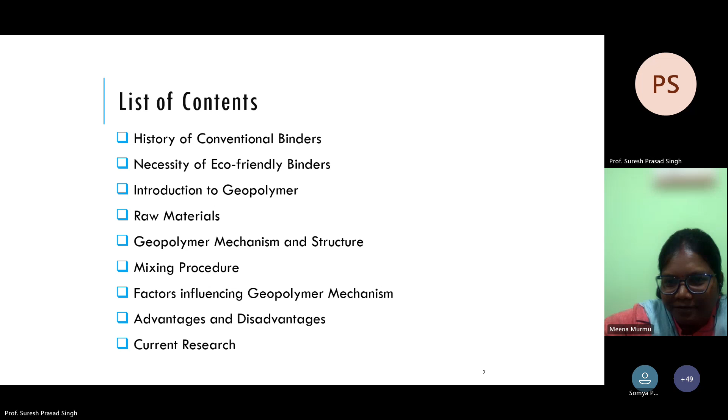This outline of the presentation will touch upon the history of conventional binders, necessity of eco-friendly binders, introduction to geopolymer, raw materials required for the synthesis of geopolymers, geopolymer mechanism and structure, factors influencing geopolymer mechanism, advantages and disadvantages of geopolymer, and research in this area.

Coming to the history of conventional binders: the conventional binder that civil engineers use in construction is OPC, ordinary Portland cement, and it is extremely used in our construction industries. It is the second most abundantly used material next to water, and the annual production of OPC is about 4.4 billion tons in 2023.

If you see the increase of OPC production from 1995 to 2023, it is around 1.3 billion tons increasing to around 4.4 billion tons, and the demand for cement is increasing day by day because of infrastructural development and associated activities.

But the problem with OPC, despite huge demand, is that it causes several environmental impacts. Serious environmental issues are related to the production of OPC.

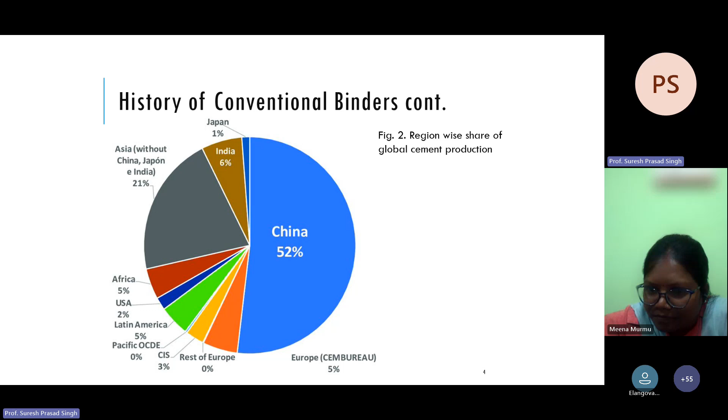Coming to the global production of OPC, this conventional binder: China is 52%, India 6%, Japan 1%. Altogether, these Asian countries account for around 80% of cement production, and all other continents contribute only 20%. India has a major share of around 6% in cement consumption, next to China.

And if you see the production process of OPC, is it sustainable or not? So can you tell me, what is the material we are using as civil engineers in our construction - is it a sustainable material?

Focusing on this one, I'll tell you that production of cement requires huge mining of natural resources. We use limestone, dolomite, and natural clay as ingredients for manufacture of cement, which is not a renewable source, because once the limestone or dolomite is exhausted, it will be exhausted. It is not a renewable source of material. So huge amount of natural resources are mined for this.

This mining is accompanied by high energy consumption. The energy consumption for 1 ton production of OPC is around 3.5 to 4 gigajoules of energy. Huge energy we require, and to get that energy we burn fossil fuel, coal, or petroleum products, resulting in high emission of greenhouse gases.

It is said that about 0.85 tons of carbon dioxide is released for production of 1 ton of cement. The present cement production is 4.4 billion tons annually, meaning around 4 billion tons of carbon dioxide we are releasing to atmosphere, which causes great concern to our environment. The cement industry alone is responsible for 5 to 8% of carbon dioxide emission globally.

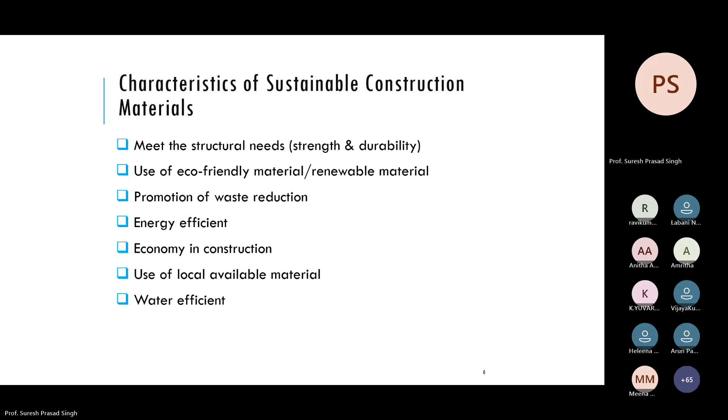If you construct a pyramid, it will be appreciated - it is a very big, huge structure. If you construct a Burj Tower, it will be appreciated. And particularly roads, rail networks, embankments, dams - huge material we use, we consume the material. So civil engineers consume natural resources abundantly.

So we are civil engineers, so we have to see how the use of natural resources can be minimized. But keeping this in mind, our construction activities should not suffer. So there is a societal need and there is a restriction, and that has to be balanced between societal need and our construction material.

Then next comes the environmental concern. So once you are using a material in civil engineering construction, it should be environment friendly. It should not affect the environment much, so the environmental impact should be minimum. First, we have to meet the need of the society. Second, it should not pollute the environment or have a bad effect on it.

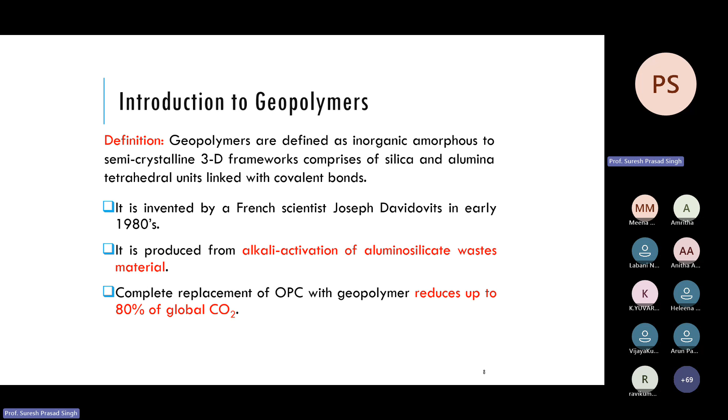Then coming to what is the raw material - where do you get this raw material from for geopolymer production? Mostly it is waste material, industrial byproducts. Industrial waste like slag, blast furnace slag, fly ash, rice ash, red mud, municipal solid incineration ash - these are industrial byproducts. Nowadays we don't call it waste, all are byproducts that we can use in our construction or other purposes.

Then we have construction and demolition waste - construction cement, concrete, brick, crushed brick - these can also be used for production of geopolymer.

Then agricultural waste: we have rice husk ash, sawdust ash, bagasse ash. All this material can be used as mineral resources for the manufacture of geopolymer. And you see, I'm telling that blast furnace slag and fly ash can also be used.

So what is fly ash? This fly ash we used to get from the power plants, from burning of coal. We got the fly ash. So what is fly ash?

If the coal, which is carbon, and pulverized coal is burned in the boilers of the thermal power plant, the residue is fly ash. If the carbon is burnt in the boiler, it gets oxidized and becomes carbon dioxide, which is released to the atmosphere. Then what is left? The left out portion we call fly ash.

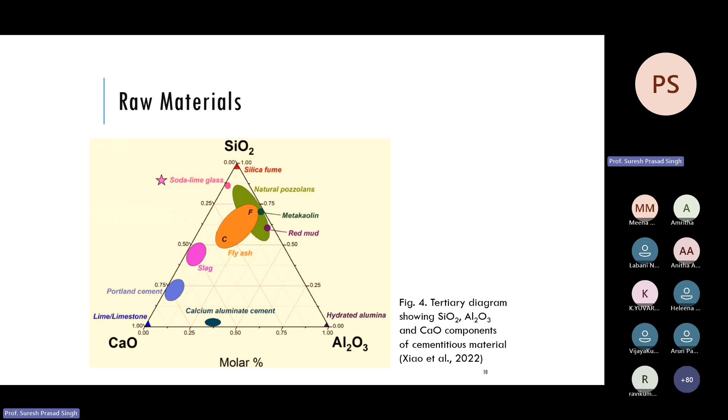Now coming to the raw materials used for manufacturing geopolymer, it is arranged like this: we have Portland cement with its composition of calcium oxide, aluminum and silicon oxides. Then we have slag, blast furnace slag, and fly ash—you can see class C and class F fly ash based on their calcium oxide or other composition. Then we have red mud, metakaolin, silica fume, limestone, and all these materials used in the synthesis of geopolymer, or as binding material.

Coming to raw material production, for blast furnace slag and steel slag, the top producer is China. India is the second largest producer of crude steel as well as blast furnace slag and steel slag. A huge amount of this slag or waste byproduct, which can be effectively used in geopolymer production, is generated in India, since we are also the second largest producer of fly ash—both main components in geopolymer production.

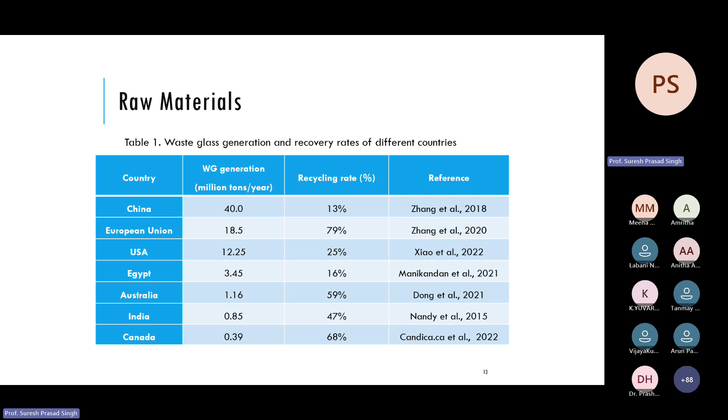So the process of geopolymerization is like this: we have the raw material, and it should be aluminosilicate material in glassy phase, not crystalline phase. Then we have an activator—either alkali activator or acid activator, giving acid activated or alkali activated geopolymer accordingly. But most of the research is on alkali activated geopolymer.

So we have a raw material and an activator, which is mostly sodium hydroxide, potassium hydroxide, silicates of sodium and potassium. When we add this, there will be dissolution of the raw material, which contains silica, alumina, oxygen, and other elements. These elements get dissolved, giving silica, alumina, oxygen, hydrogen, and of course we are adding sodium or potassium from the alkali activator. By adding these two, the elements get separated because it is an amorphous structure.

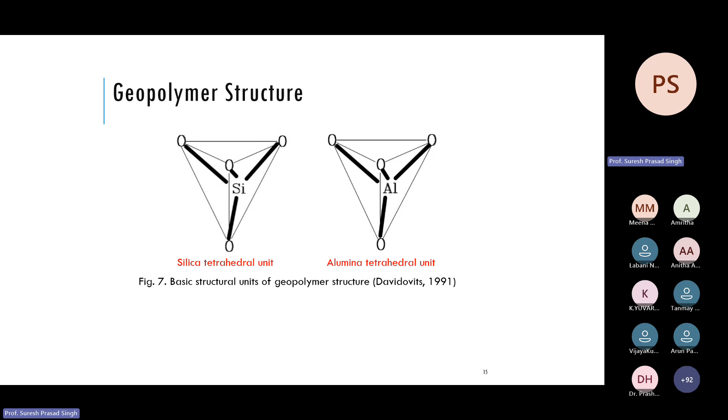So this is the basic structure of geopolymer formation started. First is dissolution, then formation of this type of structure. This structure is given by Davidovits. Next, this is linked to form a chain-like structure or continuous structure.

We have this, depending upon the silica to alumina ratio in our aqueous solution. If it is close to 1, we call it polysialate. If it is 2, we call it polysialate siloxo. If the silicon to alumina ratio is 3, we call it polysialate disiloxo. Here, a sialate ring like this one.

So next you see how it is linked. If the silica and alumina ratio is 1, you see the structure: there is 1 silicon, 1 aluminum, then an OH group is there. And if you see that middle oxygen here, it has a negative charge deficiency, which is shared by a potassium ion.

This aluminum, you see, this is silicon which has +4 charges, positive charges, shared by covalent bonds. Each positive charge is shared by a negative charge here, so it is balanced for silicon. But if you see this aluminum here, it has 3 positive charges shared by 4 units, 1 covalent bond. So this aluminum has a shortage, its valence is +3, but it is shared by 4 negative ions. So it has a shortage of a positive ion, a net negative balance, which is balanced by a potassium cation.

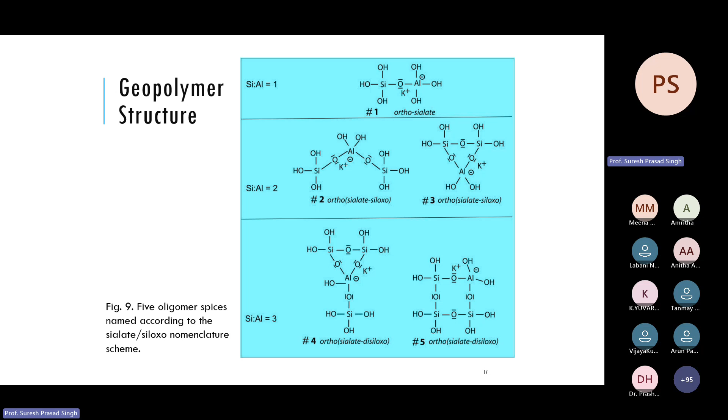Some amount of water is released, but we need to add water so that there will be an aqueous solution, so the transfer or movement of elements from one place to another, so that a bonding will be formed. Water acts as a medium for transport of the ions, metal and OH oxygen ions. Finally, it releases water in the process and we'll get a 3D structure.

This is the basics about how the structure is formed, but we civil engineers were not that much bothered or interested in this. We, as civil engineers, were more interested to know the strength, the durability, performance, fresh properties, hardened properties, and things like that.

As I told, if the silica to alumina ratio is 1:1, we'll get tiles, ceramics, and those geopolymers can be used for fire resistance. If it is 2:1, cement concrete. So for the manufacture of geopolymer cement, this ratio of silicon to aluminum should be 2, and slightly above this 2, and we'll get cement concrete.

If it is more, then the properties of cement required, compared to OPC, will not be there. So you will be using 2 to 3, and that will be most optimum, I'll tell you. Still higher you can go, but it depends upon the silicon aluminum ratio that should be there.

Then we'll have this—how we will produce this one? The process of production of geopolymer concrete: you have a coarse aggregate, as usual in the production of OPC or concrete from OPC. We have a coarse aggregate, then a fine aggregate like sand, then cement in conventional concrete. But here we have an aluminosilicate material, and this aluminosilicate material should be in amorphous stage.

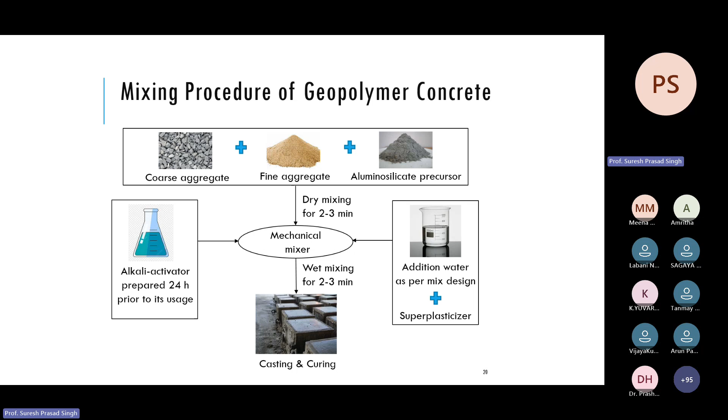Coming to the factors influencing geopolymer mechanism, we'll see how a good geopolymer can be produced. First is the type of aluminosilicate precursor, fineness of the precursor measured in terms of specific surface area, type and concentration of alkali activator, molar ratios such as silica to aluminum, sodium to aluminum, and calcium to silicon ratio. There should be a proper range of ratios which gives the best geopolymer. Next is the liquid alkali activator to solid binder ratio, water content, time of mixing, and curing regime. All these factors influence the strength and durability of the geopolymer.

It is not only about the availability of silicon and alumina in the source material, but how much of it gets dissolved. The bonding of silicon and aluminum in the material is in oxide form, and when you add alkali, they get released. But the bonding strength between silicon-oxygen and aluminum-oxygen differs, so different magnitudes of silicon and aluminum will be released from the aluminosilicate material. Even though it contains aluminosilicate material, not all of it will be released at the same concentration or molarity of alkali.

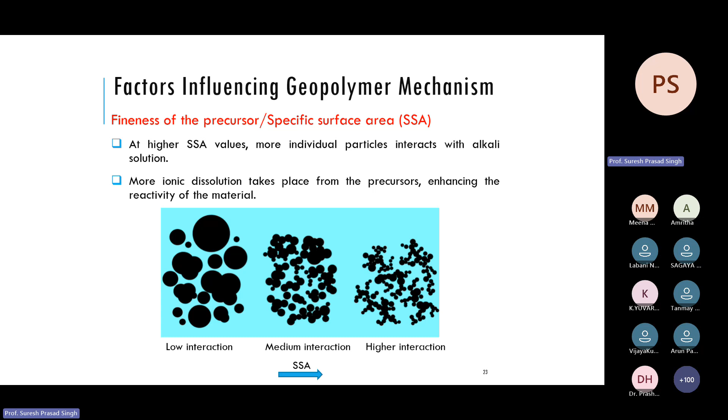Then the type and concentration of alkali. Normally you use sodium hydroxide, potassium hydroxide, sodium silicate, potassium silicate, and combinations of these. You use silicate in conjunction with the alkali material because sometimes the silica to alumina ratio, which should be 2 to 3, is not obtained from the source material. Whatever source material like fly ash or slag you are using, if this ratio is not maintained and silica is less, we use sodium silicate to supplement it.

The release of silica from sodium silicate is easier because the bonding between silicon and oxygen there is very weak. So if you use sodium silicate in conjunction with sodium hydroxide, you get a lot of silica ions, giving an optimal silicon to aluminum ratio of 2:1, which gives better strength.

So appropriate alkali concentration matters, and there is a lot of research on cation diameter and such things. But in a nutshell, it depends on the concentration and type of alkali, and the secondary source of silicon. If you add sodium silicate or potassium silicate in conjunction with sodium hydroxide, that becomes the secondary source of silicon to the structure.

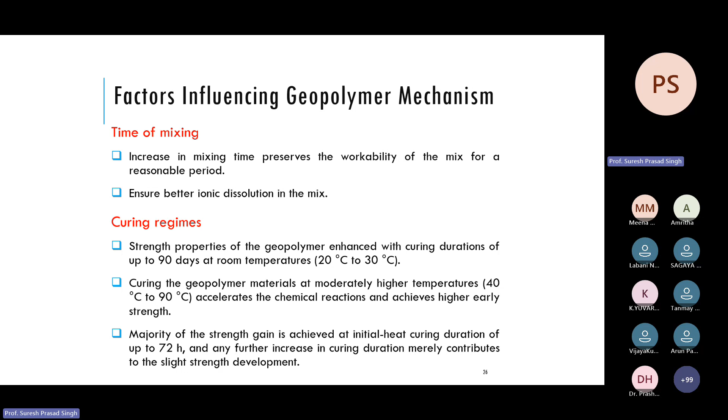Then the curing regime. Geopolymer can be formed at any temperature, ambient temperature and all these things, but it is found that initial heat curing is very beneficial for strength and durability. Most research papers say initial 24 hours, or up to 3 days, of heat curing, after which ambient curing, maybe 20 to 30 degree curing, will give good strength. But initially, any temperature above the freezing point of water can develop the strength, though heat curing is found to be very much beneficial.

Advantages of this geopolymer: it gives 80% reduction in carbon emission, higher strength and structural properties, low creep and shrinkage, higher resistance to fire and chemical attacks, low permeability, and better encapsulation of metallic ions. Since most raw materials we use are industrial waste or byproducts, they contain metallic ions, heavy metals, and toxic elements. The geopolymer structure encapsulates these harmful metallic ions; otherwise they would leach into the surrounding and create environmental impact. So there is good encapsulation of ions, which reduces the waste management issue.

Several industries are highly suitable for precast applications because it's a very fast setting material.

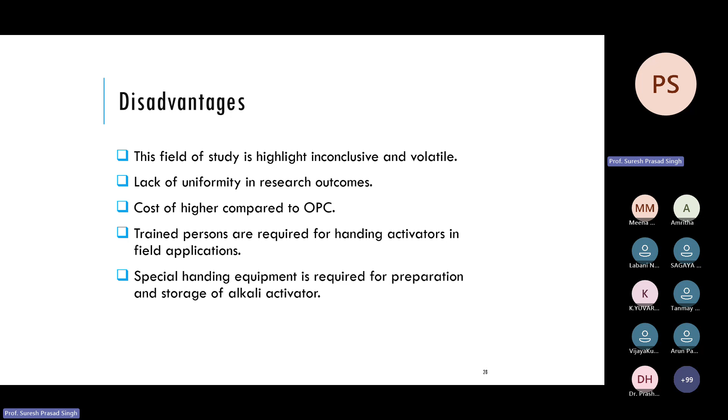As for disadvantages, this field of study is highly inconclusive. Research available on geopolymer depends upon method of manufacture, raw material used, and all the parameters discussed earlier, so different strengths result. There is no generalization about strength, durability, production process and all these things; it has not yet evolved. So there is a lack of uniformity in research outcomes, with some contradictory results, and the cost is also higher.

That's not audible. Hello. Hello.

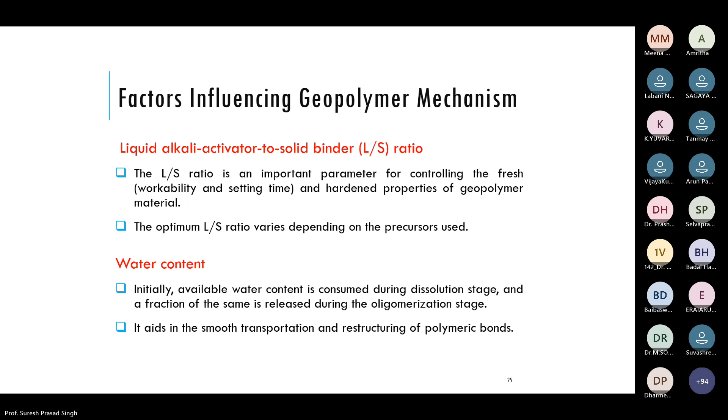There are some disadvantages, and one of the biggest is handling alkali in the field. As I told, there is a solution to that: a one-part geopolymer. People are researching on this.

Coming to this, I will just highlight some of the things we recently did in our institute here. So many research works are there: geopolymer produced from slag, from fly ash, other aluminosilicate raw materials, or binary geopolymers.

Recently we tried granulated blast furnace slag with soda lime glass. There is a huge amount of waste glass dumped or thrown, and the motive of using soda lime glass in geopolymer is that geopolymer requires alkali material - we use sodium hydroxide, potassium hydroxide, or silicates as a source of alkaline material. This soda lime glass contains a high percentage of sodium oxide, and if you use a part of the soda waste glass along with the slag, the consumption of alkali material will be reduced much.

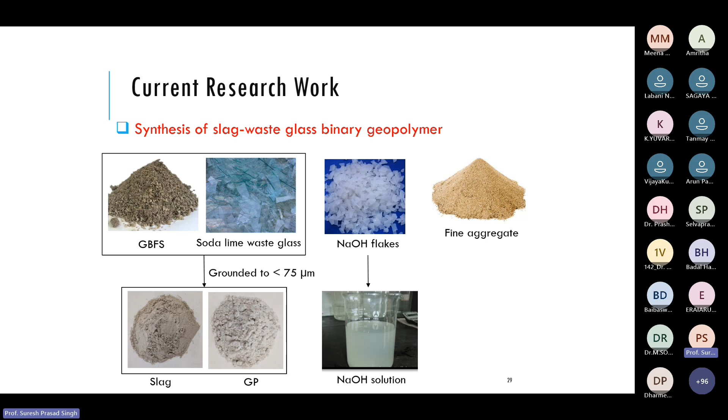Both are amorphous. There are no remarkable peaks, only two humps there, and these humps show that the material is in glass stage or amorphous stage. There is no crystalline structure. And as I told, the material, aluminum silicate material, should be in glassy phase so that will give you better

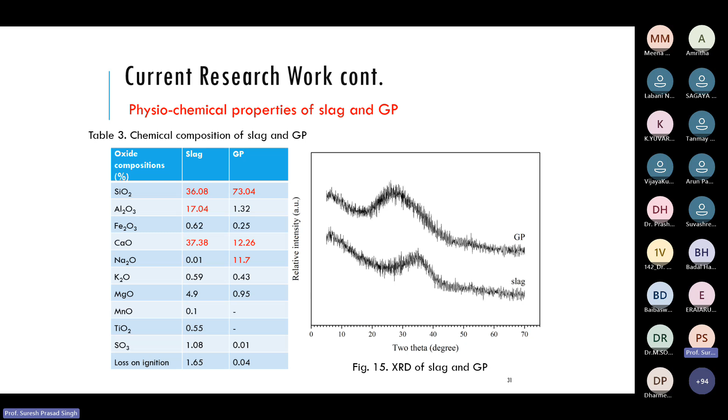geopolymer. So both materials, what is found from the XRD, are highly glassy or amorphous. This is the composition of slag and GP, and you see that sodium oxide, 11%, is there in GP. This reduces the consumption of sodium hydroxide, used as alkaline activator, because this contains sodium oxide, sodium cations. And the release of silica is also more here, contributing silicon ions for geopolymer production. So these are the two advantages of using GP along with fly ash or slag and all these things.

So we have tried with different GP content, then the sodium hydroxide concentration starting from 2 molar to 10 molar, liquid alkali activator to solid binder ratio starting from 0.25 to 0.45. And we have prepared these mortar samples with standard sand and binder ratio of 3:1.

Time will not permit going through all these things, so I will just tell you the salient features. The solubility of slag is the basic thing you have to see, the release of silicon and aluminum ions. First you have to check the solubility, then study the fresh properties like setting period, soundness, then the hardened properties, compressive strength, mineralogical study, and then durability.

So in the durability studies, we studied resistance to fire attack. As I told you, if you use soda lime glass, the residual strength after exposure to fire will be high because it retains strength even when exposed to high temperature. That is one of the major things we got here.

Then resistance to freeze-thaw, wetting-drying cycles, similar to what we do for conventional cement. This includes wetting-drying and freeze-thaw cycles, water slaking, then resistance to acid attack, chemical acid, alkali-silica reaction. These are the durability studies we have made on this slag-GP binary geopolymer.

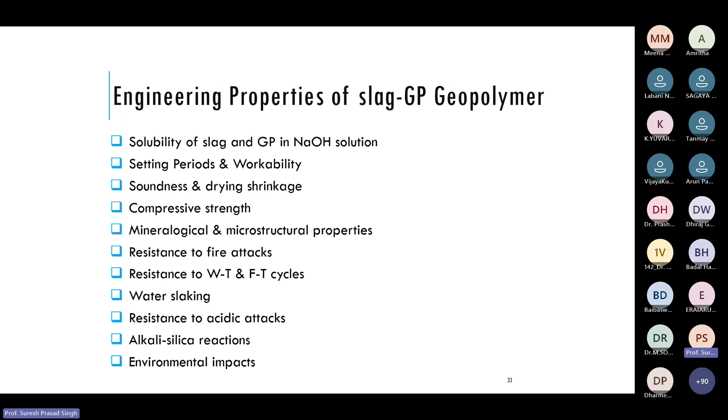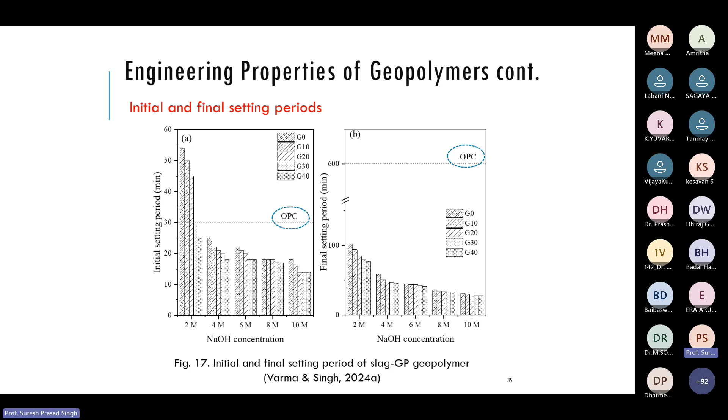One key feature is the quick setting of this geopolymer paste. Normally OPC should have an initial setting time of 30 minutes and final setting time of 10 hours. But in geopolymer, the setting time is too less. So sometimes we use borax to increase the setting time, because it is a very quick setting material. We modify it by adding compounds to increase the setting period. But it is observed that it is still too less here - instead of final setting around 10 hours, we got less than this.

Then we have the soundness test. Soundness was determined with different molarities and glass content. As per IS 4031, the soundness should be less than 10 mm, but we got a maximum of 4 mm soundness.

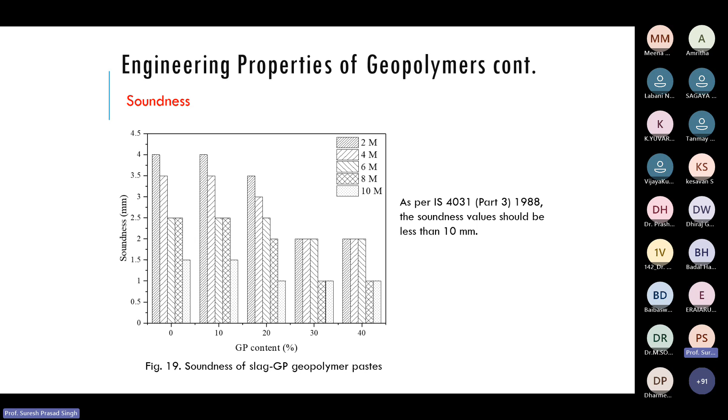What are the benefits you are getting out of this? And then the compressive strength, with different molarities and different glass content. But as you can see, if you replace the slag by glass powder, the strength reduces continuously. This happens with normal curing, meaning an ambient condition between 20 to 30 degrees.

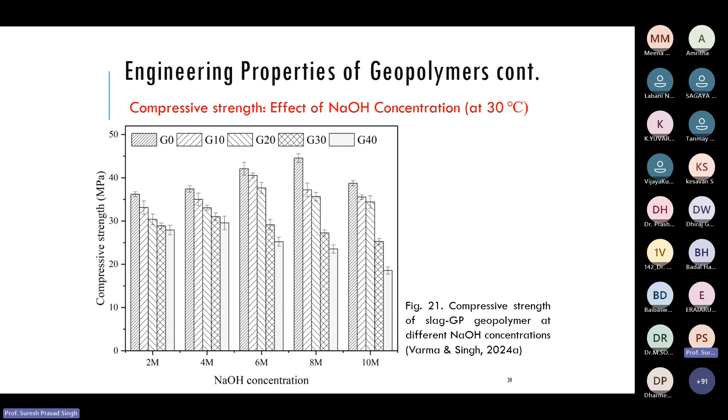This is because the release of bonding will be strong, release of silicon will be less, and slag will have a lot of calcium component. So in the geopolymeric product, if you use slag, we will have hydration products because of calcium—we get calcium silicate hydrate, calcium aluminate hydrate, in addition to the geopolymeric product. But if you replace the slag with glass powder, we will be sacrificing these hydration products like calcium silicate hydrate and calcium aluminate hydrate that we got from the cement.

But with high temperature, the strength increases. This gives you the normal temperature at ambient 30 degrees. Everywhere we still get less strength if we increase the glass content.

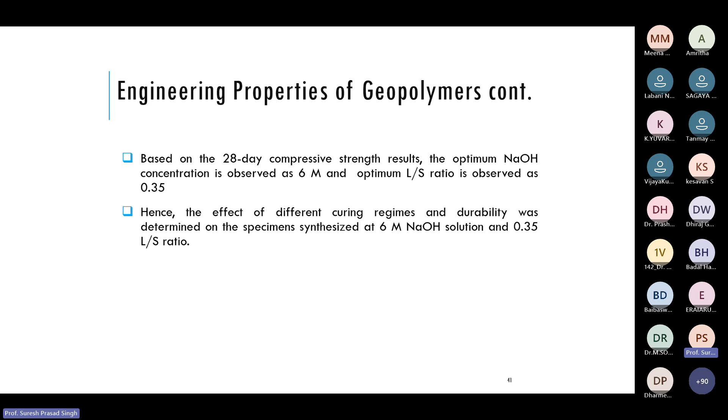I have only 20 minutes, okay.

As the temperature increases, the strength gain with time also increases, and the final strength will also be high. So what this tells us is that although it's said that above freezing point it will harden, the most optimum value is obtained at an initial high temperature of 45 to 60 degrees.

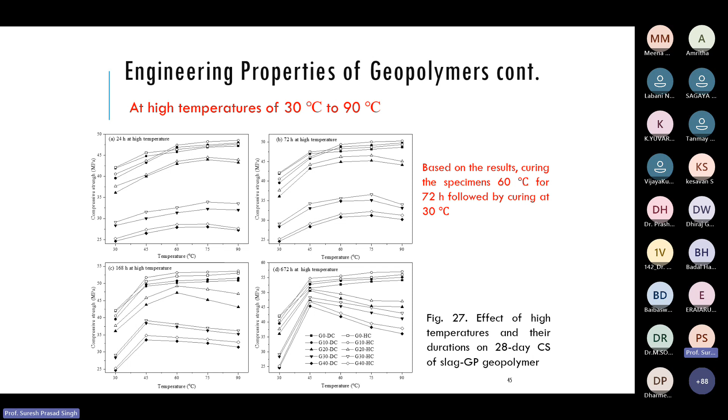Based on the study, the specimen should be cured at 60 degrees for 3 days, followed by normal curing. So initial high temperature curing favors high strength gain and high ultimate strength.

One more thing we investigated: normally in concrete, curing is done under water. If you put the specimens in water, after 1 day we demold these sample cubes, then try to put them in water at different temperatures—30 and 60 degrees. We used different types of water: normal tap water, alkaline water, saline water, and so on.

What I find is, if you put our samples in normal tap water, since we have sodium hydroxide in the sample, there is an escape of sodium hydroxide from the sample into the water. That means after 1 day, the sodium hydroxide activator we added is not fully used for the production of geopolymer—some of it leaches out, so the strength reduces. So if you put a geopolymer sample in normal water for curing, there will be a reduction in strength. Instead, if you use alkaline water, this strength reduction will not occur. And as the temperature increases, the strength also increases.

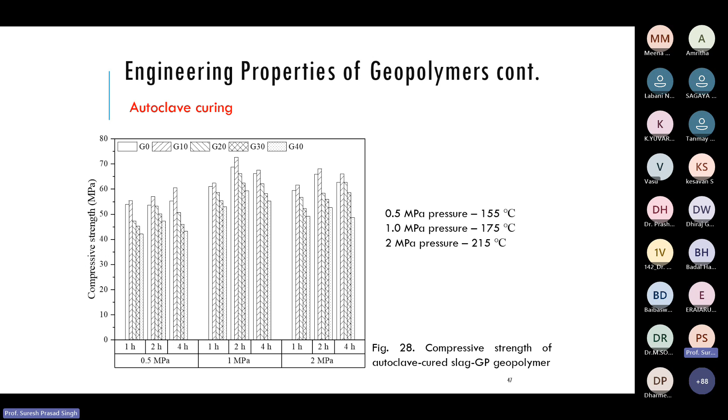We also conducted curing with autoclave, for uniform curing, so shrinkage cracks will not be there, uneven curing is not there. You can see that solid materials are formed once the autoclave curing is adapted.

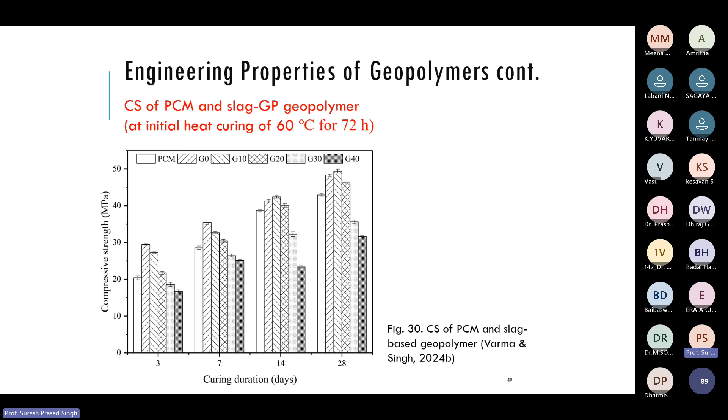This is the initial heat curing of 60 degrees for 72 hours. After that there is normal curing, and we got a very high strength, as high as 50 MPa.

We studied the durability against fire attack, wetting and drying, freezing and thawing cycles, water slaking, acidic attack, alkali silica reaction, and all these things.

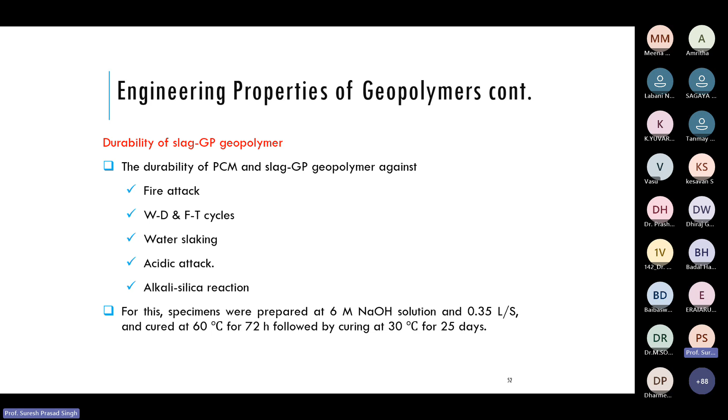All these tests were done on sample specimens prepared at 6 molar sodium hydroxide concentration, at a liquid to solid ratio of 0.35, cured for 28 days total. Initial curing was at 60 degrees centigrade for 72 hours, and after that at 30 degrees for the remaining 25 days.

The procedure we adopted: samples cured for 28 days, starting from ambient temperature around 30 degrees Celsius, gradually raised at 5 degrees centigrade per minute till it reaches 200, 400, 600 and so on. Once reached, samples are exposed to that high temperature for 1 hour, then we gradually reduce the temperature back to room temperature. Then we find out the mass loss and the residual strength.

For conventional Portland cement mortar, the mass loss is about 9%, but here it is only 1 to 2%. The corresponding residual strength, for 1000 degrees, shows much strength reduction in Portland cement, from 45 MPa down to around 5 MPa after exposure to 1000 degree centigrade heat.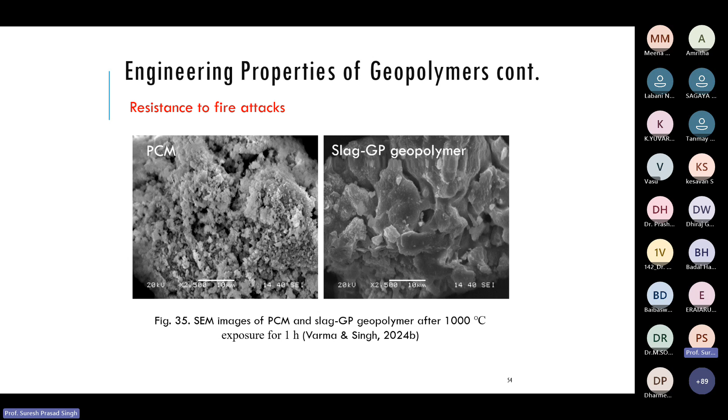So the structure is retained. This tells us that geopolymer is very good at resisting high temperature exposures.

Then again, similar thing with wetting, drying, and freezing curing cycles. It was exposed to a total of 12 cycles of wetting, drying, and freezing thawing. After 3, 6, 9, and 12 cycles of exposure, we determined the mass loss and measured the residual strength.

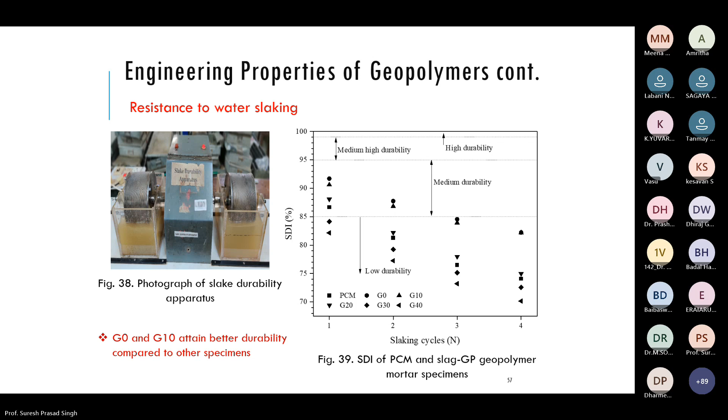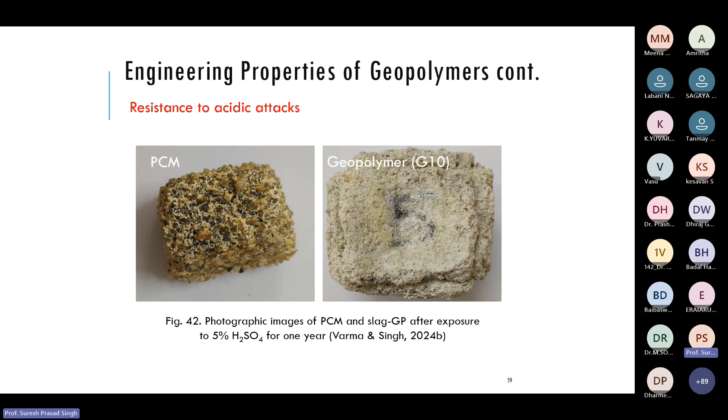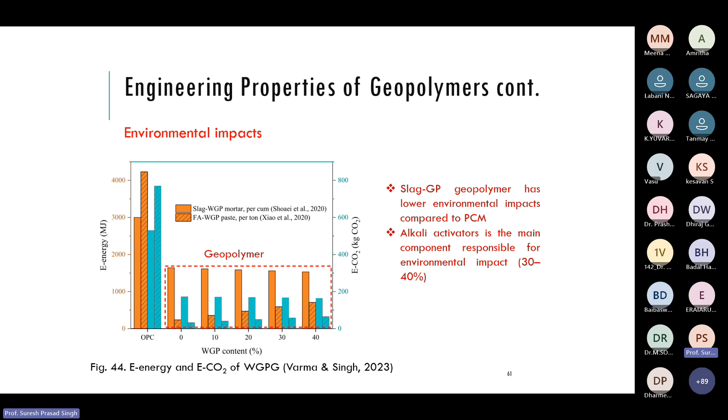We have also looked at energy consumption and carbon dioxide release. You see that energy consumption is much higher in the production of OPC, slag cement, and similar materials. But here we have much lower energy consumption as well as reduced carbon dioxide release, and overall you use sustainable waste material.

As I told you, the durability and strength properties of geopolymer mortar and concrete are much higher than conventional materials. The only issue is how to manufacture this in the field, because we will be handling highly alkaline material. Another problem is that if there is unreacted or excess alkali added in the field, it can leach into surrounding ground and water bodies - these are the two major problems associated with this.

One research direction is a one-part geopolymer, which would solve the issue of handling and storing the alkaline solution in the field, but that is yet to come to practical field application. I think that quickly covers the few things we wanted to discuss.

So the last thing I told you about is the part I have seen recently - one of my PhD students worked on using glass powder for partial substitution of slag by glass powder.

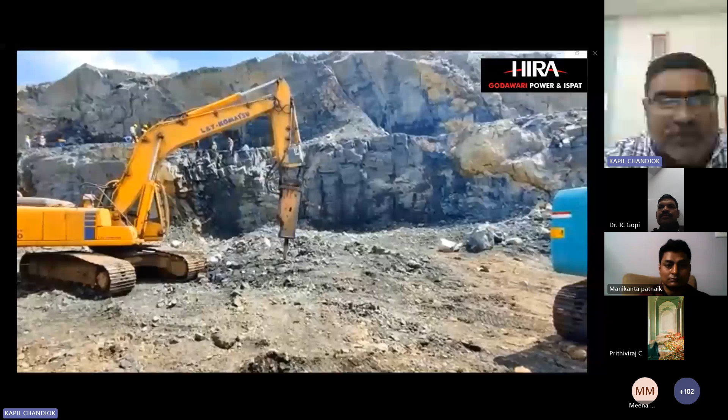This is the mine where we do mining activities, from these two mines - first one is from Aridongri and second one is from Boria. In forthcoming slides, I will be showing the process of how it is being handled - these are all circuits showing how the product is segregated, sized, screened, and the outcome includes slag and other byproducts from this process. This is our plant premises, a small temple is also there. These are areas which we are developing.

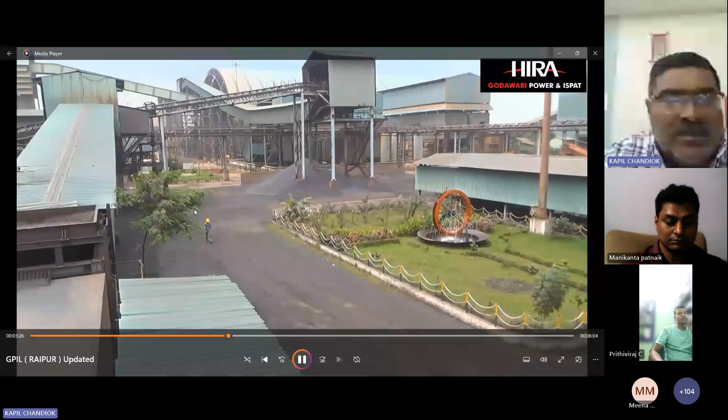This is the first division, the pellet plant. Pellet plant produces green steel. It's a pollution-free plant where you produce pellet directly from iron ore fines. Whatever fines are generated, we develop pellet here. This is the entire overall pictorial view of the pellet plant.

This is the balling mill in which the balls are prepared. Here the mixed material is poured and balls are prepared. This is a travel grate where the balls are generated to give them a proper shape.

This is the kiln where, at a temperature of 1400 degrees centigrade, the balls coming from the travel grate are roasted. This is the cooler where you get the material. This is the kind of material you are getting.

Now coming to the sponge iron plant. This is the sponge iron plant. Next is the power plant.

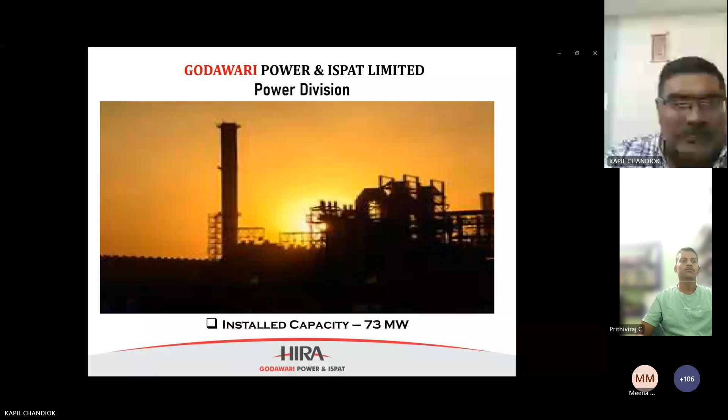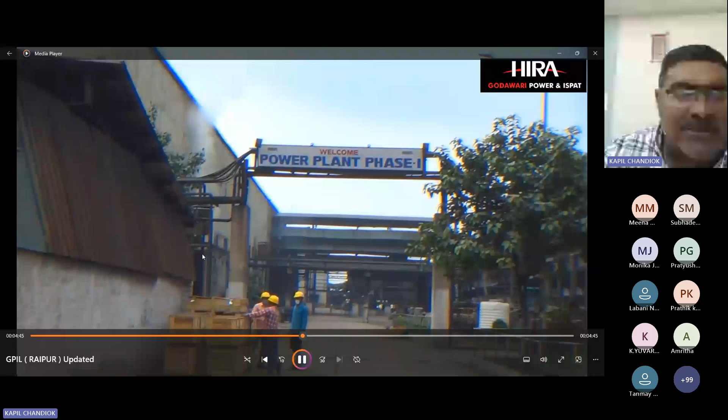This is the power plant which feeds power to everybody. Safety is our first concern. These are the cooling towers which keep the system running. This is the electrostatic precipitator, from which, after processing, we release the gases through the chimney.

So this is a very small view of our entire plant. This is phase 2. Let me hold it here. See, this is the ESP, this is the ABC DSC building, and this is the kiln portion.

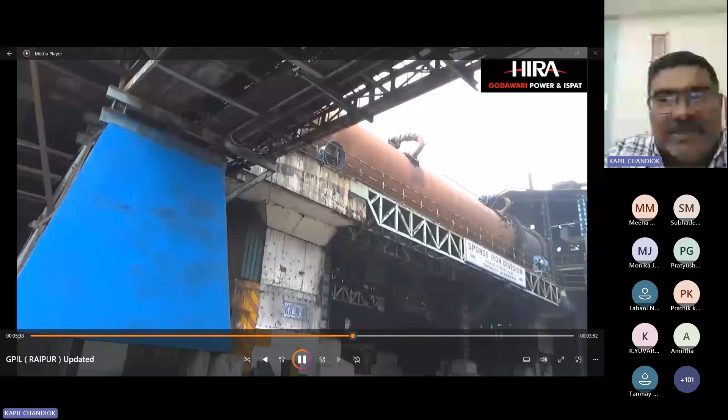These are all the coolers which come up after heating. This section is being treated, and this is the final discharge where you get the material out. These are all the supporting infrastructure. This is the pellet plant output.

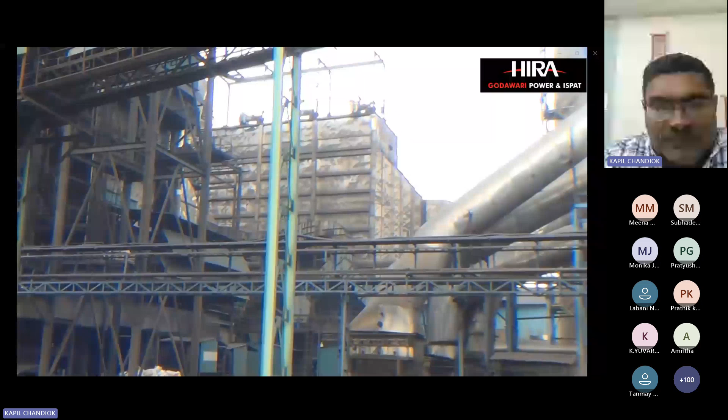This is our stock where material is stored. Now coming to the ferroalloys division, we produce 16,500 tons of silicomanganese, which requires manganese, iron, and coal.

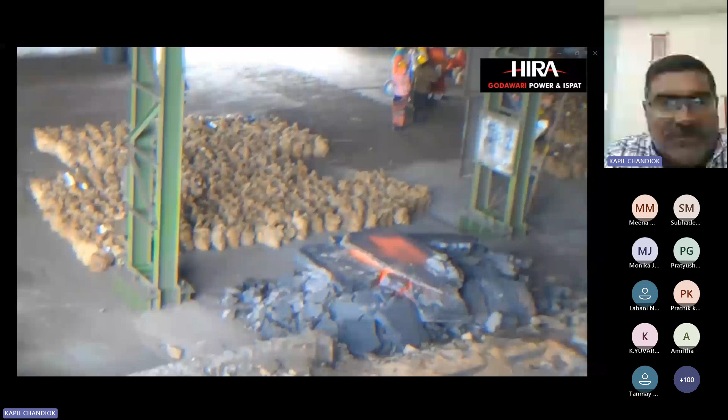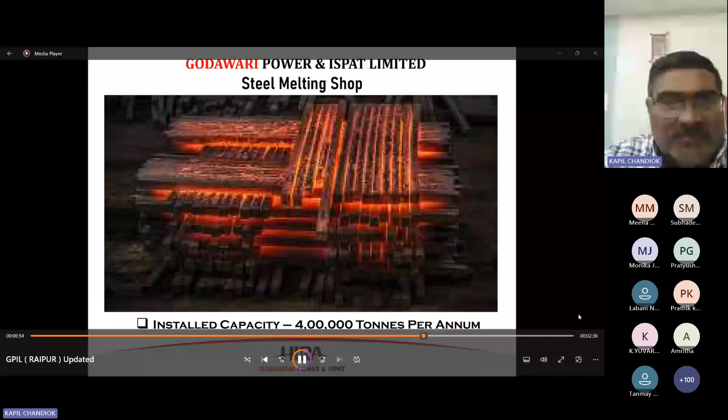We have a steel melting shop where we produce 4 lakh tons of billets. These are the furnaces; I'll explain this in more depth in the next slides, what kind of material and slag we get. Everybody talks about the slag, but what is that slag and how are we getting it?

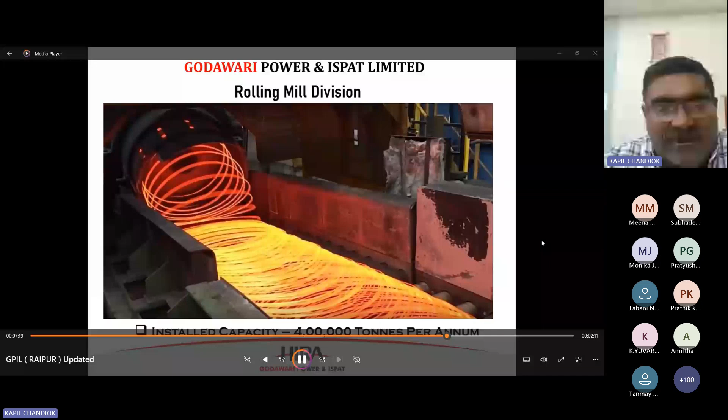This is the process. Next, we have a rolling mill of 4 lakh tons per annum capacity. This is how the rolling mill comes up with preparing HB wires.

Billets are turned into wires, and these wires are further processed into binding wire, nails, and other activities. This is how they are produced. This is the cooling bed, and now it's at the final edge of packing. This is how things are packed.

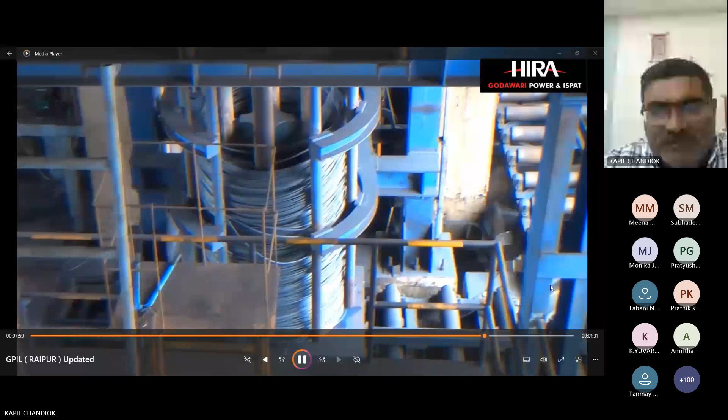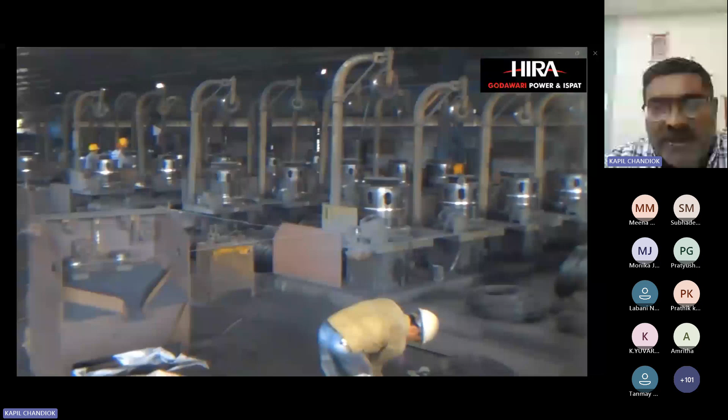This is the wire drawing section, where HB wire is brought and drawn into smaller sections. Here different gauges of wire are prepared for different purposes, from binding wire to annealing wires, everything. Whatever gauge you require is drawn here only. These are the small bundles which are available and ready to pack, ready to dispatch.

This is our railway siding. Finally, the material is dispatched to other states and other countries, and this is the point where we receive the raw materials.

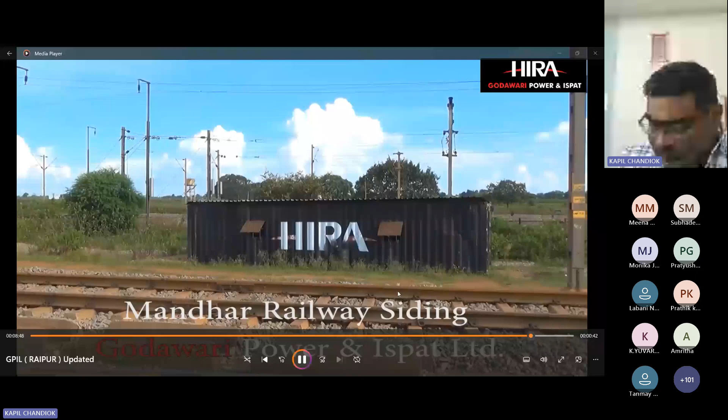This is the entire process and business scenario of what we are doing here. This is the final picture of Godavari. Now coming back to the topic.

Sir, it is not audible. Hello, sir, yes sir, you are not audible. I think due to some network problem, it is not clear. Now is it audible? Yes sir, it is audible. Your slide is also not visible, so you may have disconnected. Okay, what about that video I played, is it visible or not? Yeah, that one is okay. Within a few seconds, it was not visible. Okay, now coming back to the main slides. Yeah, now it is okay.

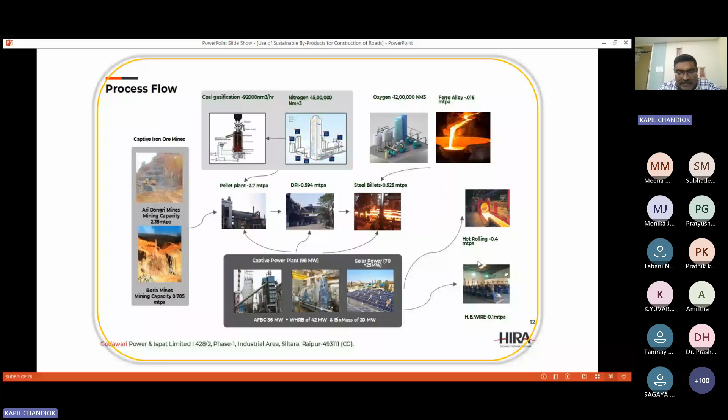Now, what are the byproducts and where are we getting them? First is steel slag, a byproduct of steel production used as a replacement for natural aggregates in road construction. Second is fly ash, a byproduct of coal combustion used in concrete and cement production for road construction.

Construction and demolition waste is recycled material from demolished buildings used in base and sub-base layers. Recycled asphalt pavement is reclaimed asphalt from old roads, reused in new asphalt. There's also plastic waste and blast furnace slag waste. These are the wastes which we are using in the construction industry.

Now coming to steel slag. What is steel slag? How is it produced and where is it used? Before coming to this, I would like to share some good slides so you can be very clear where it comes from and how it is used.

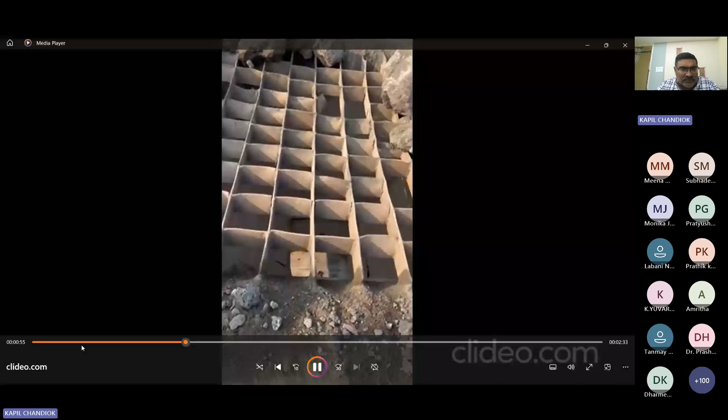Now it is visible. See, this is the furnace where metals are being melted, and this man is bringing the top dust particles and slag outside the pit with the help of this spoon. This is the material which comes out. This is the actual slag which is being transported to the slag crusher, which I'll show you in the next slide.

See how things are being drawn out. This is the furnace. They are pouring the fresh material from this end, and slag has been dragged out from the pits to this portion. There is a bucket there, and this metal is taken to a yard.

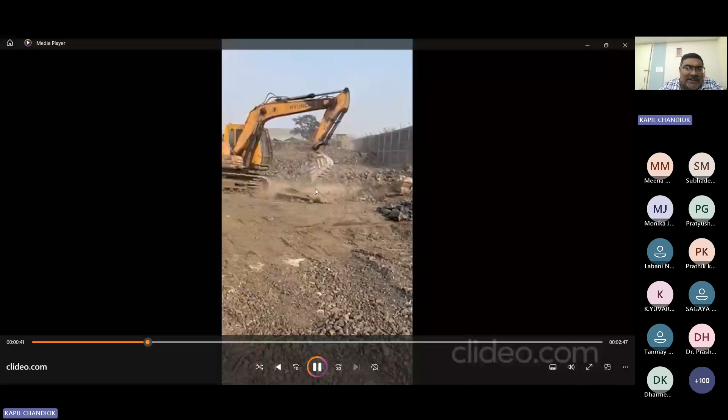It is further broken down into small particles with the help of a slag crusher. This is a grizzly where we feed 150 mm to 200 mm size material. Below this is a magnetic separator, a crusher, and a high gauss magnetic separator here.

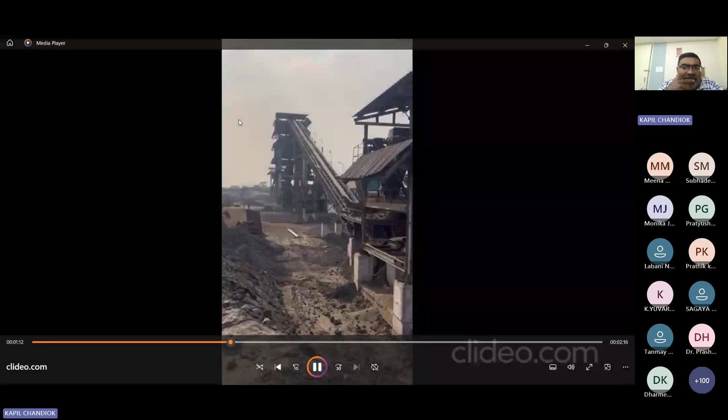See, this is the slag crusher. Actually, these are the real-time pictures which I am playing for you. This is a combination of buildings containing a slag crusher, screens, and magnetic separators. This is where the product comes out.

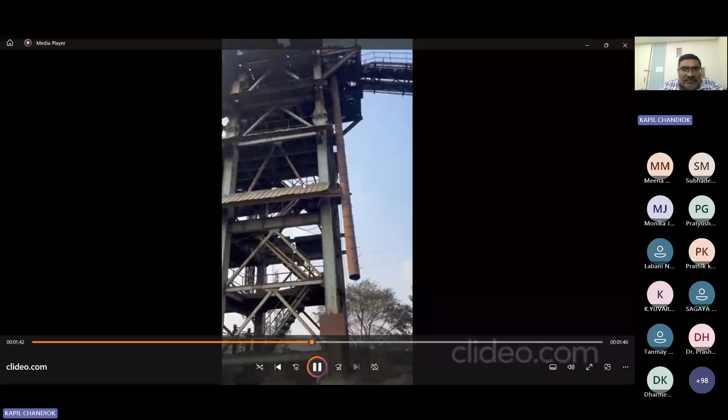This is where the product is coming up. See, this is grade 1. Here lies a magnetic separator. You get two kinds of products here: mag and non-mag. The slag which we are using is a non-magnetic material, containing a very less percentage of iron.

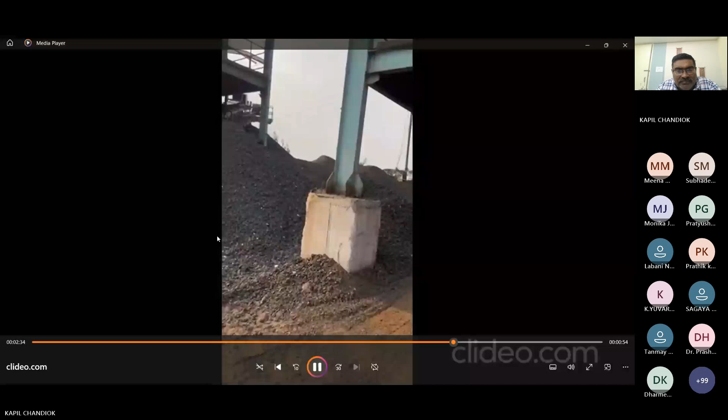See, there are two categories. First one is here in this hopper. Second one is here on the ground. This is the slag which we are using.

Any question up till this point? Faculty may ask any question. Is it clear what kind of slag we are generating and how it is being generated?

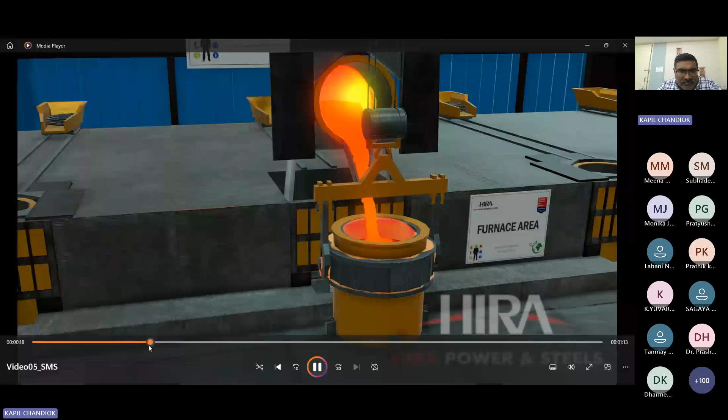Now is it clear? No sir. Yes, now it is visible sir. Is it clear now? Yes sir, it is clear. This is the furnace portion.

Once you feed the metal into it, you get the results. In this process, slag is generated. Slag is simply the top-up portion which is rejected. It contains 10 to 15% in raw form.

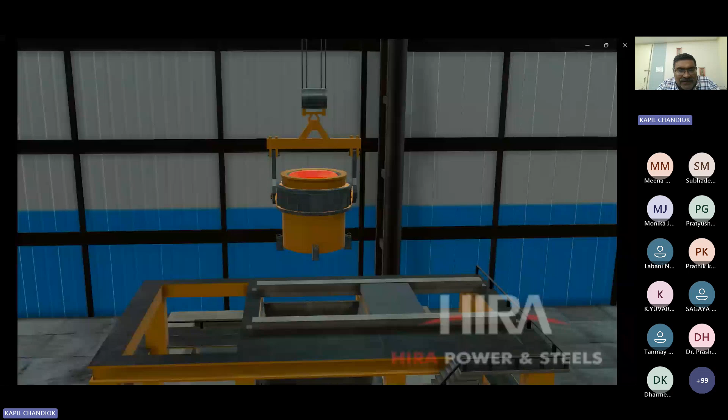See, this is what you are going through. You are using this furnace into a continuous cast, and from continuous cast you are developing your steel. Now billet is going to come. This is the billets. Now from billets it has been stored in one place. Now we are feeding it into a rolling mill and you get HB wire here.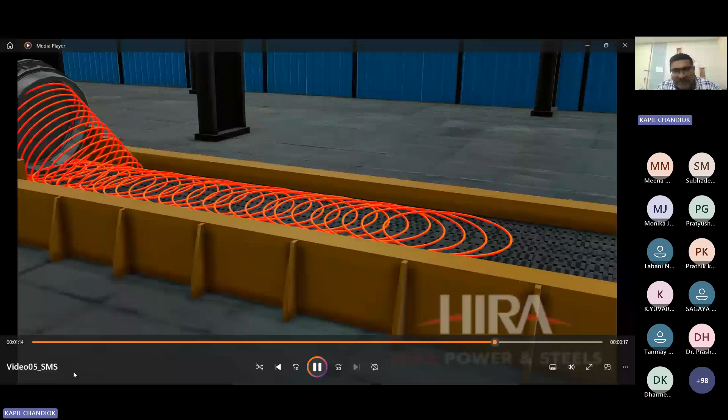This is the HB wire which is coming. I've shown the real time video. This is the animated part of it. This is how bundles are being prepared and again dispatched.

So this is the steel slag which I have shown you in real time as well as the pictorial view. Now this is how the flow chart of slag is. I've given you a brief example of how the material is being fed. This is the crusher which crushes the material in sizes of 20 mm to 10 mm, or minus 10 mm also comes. Again, you come up with a screen.

Below the screen, there are two magnetic separators. In the first part, you get out one material. Second, the high gauss magnet - again you circle it and you get the high gauss magneted part here. It comes to the belt and you take it. This is the slag portion. This is the waste which is coming up. The size is from 10 mm to minus 10 mm. This is the slag size which you are getting.

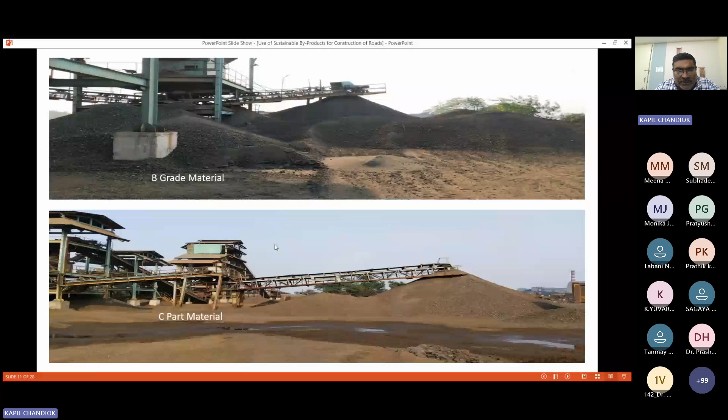This is what the slag actually is. This material you are getting and exporting for regular uses. This is the C part - the slag which is actually used in road construction. This is a very good replacement of sand, it can be used as an artificial sand also. I think some tests have been done with the help of NIT also, where they have replaced up to 60 to 70% with slag.

Now coming to the theory part. In 2024, global crude steel production was related to approximately 1.95 billion metric tons, which increased the quantity of byproducts generated. For example, in 2024 alone, India produced approximately 144.3 million tons of crude steel, and around 19 million tons of steel slag was generated.

Where do we apply this? We use it in road construction - the waste metal is very good for it, we can go for it. We can use it in building construction, in the form of an aggregate. Its properties are high density and good binding properties.

Next is how to utilize the byproducts in construction applications. It reduces waste - plants generate this waste, they don't need this material, but it is a very good byproduct which can be used in landfill spaces. This will further give resource conservation, since for road construction, muram and other materials are rarely available - in some parts of India even sand is a trouble for everybody. But we can go with this artificial sand, and it has environmental impact as well as economic benefit, so you can use this material.

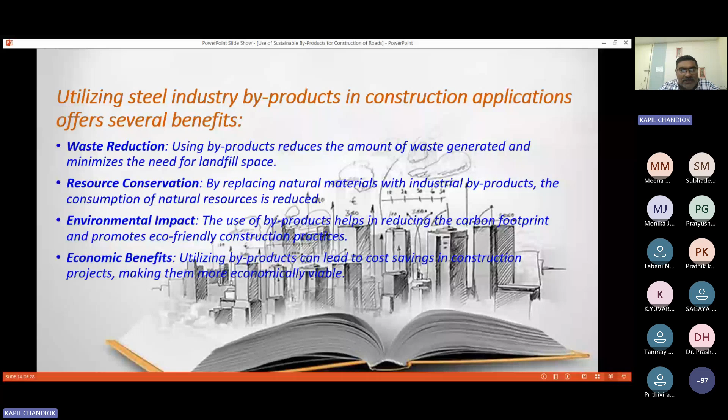Up to slag, I think it's clear. Or if anybody wants to have a question, I can take it.

Or I should proceed. Ma'am? Hello? Sir, I think nobody is interacting. They will interact, sir. Okay, no problem.

Let's move ahead. This is the second product which we are getting in steel plants, that is fly ash. As everybody knows, fly ash comes from power plants. It is basically after burning pulverized coal in power plant, it is rich in silica, alumina and other reactive compounds, making it a valuable product for construction applications. Nowadays, fly ash is a very common material available in steel manufacturing. We can go for fly ash bricks as well as in cement manufacturing.

Now fly ash is no more a waste material. It is a raw material for cement plant. Most cement plants easily buy it and use it. This is how the fly ash comes. These are the silos where we collect it, and after waste reduction, this comes into this process. Let me share a small power plant video for you.

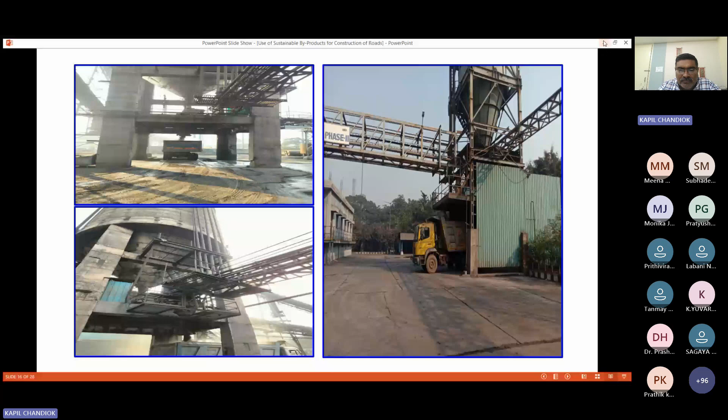I think that picture is not available. So we can go with this third part, that is beneficiation tailing. This is a new product which I think is not available with integrated steel plants, but it is available in abundance and it comes from the pellet plant.

Sir, video is not visible, only slide is visible. Done, I'm trying it. I have to close this sharing and reload it. Then only it will be available.

This is the pellet plant. This is the stacker reclaimer, which has metal stored directly from mines.

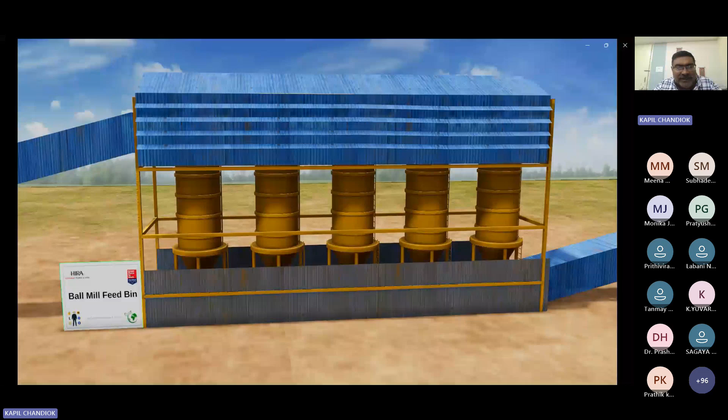It goes to the ball mills where you crush different sizes, different combinations of materials and feed it. This is the ball mill where you pour the material and granulate it into highly fine materials. Again from ball mill, you pump it to a thickener where it gets condensed and the entire metal turns into a slurry form. With the press of a pressure filter, you again recover the fine particles into dense particles. With the help of this ball mill, you size it.

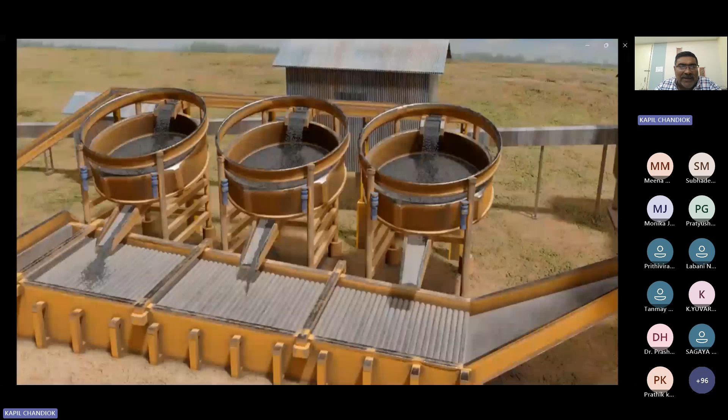Again in the kiln, you burn it, and the final product you get in a cooler point. Here you get the product. This is the entire process of a pellet plant, and at this point, this is the original ball mill where you get the products.

See sir, again double click, not visible. Is it clear ma'am? No sir, not visible. Okay. Now is it clear? Ma'am, is it clear now? No sir. Sir, not visible. Slides earlier, are they visible? No sir, earlier video also came, but now it is not visible.

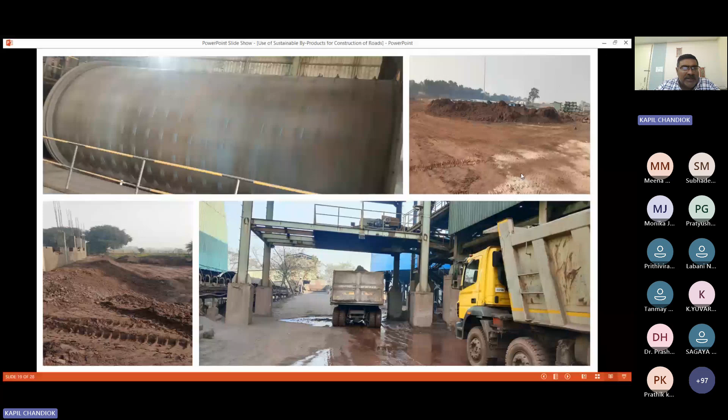You can go for it as a fine aggregate part. Even bricks, paver blocks are being now manufactured from this tailing material. This is abundant in very huge quantity, and disposal is also a problem for everybody. So these are the uses you can get from this tailing material.

Now these are the guidelines which government has set for transport department. IRC guidelines are available for sustainability, quality, environment impact, and going for a pilot project.

We go with research collaborations with NITs, IITs, all those things, and compliance is a major adherence for it.

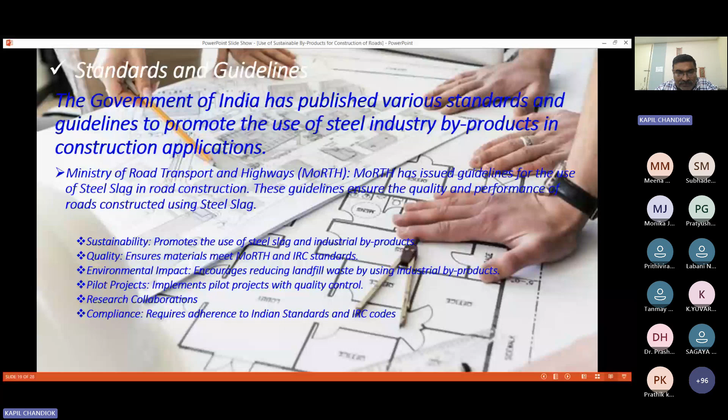These are the chemical properties which are minimum required for fly ash as well as other materials. For fly ash, these are the physical properties. The granule size should be 10 to 60 mm, and crushing strength is 40 MPa. These are all the metal specifications for slag.

For fly ash, the chemical composition is there, and for filling material, design specifications are there.

For fly ash to be used in concrete, it should be 35% of the weight of the cementitious product, and it's achievable. Minimum strength you are getting is 30 newtons per mm square in 28 days. Workability is really high. In cement, you can use fly ash, and in bricks also you are using fly ash.

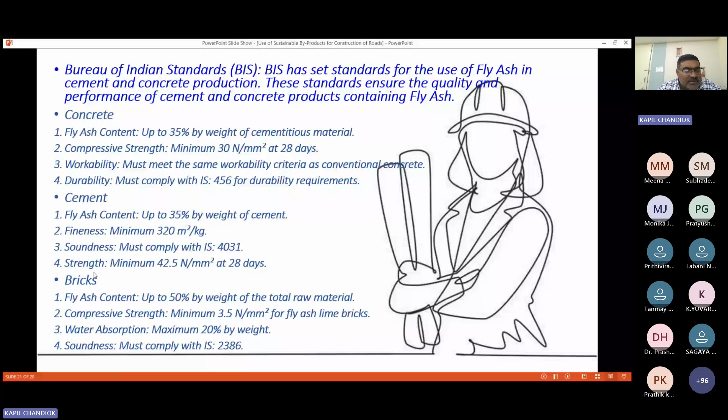These are all the green initiatives which we are taking. We are manufacturing bricks, paver blocks, road materials, as well as cementitious material. We are using it in different kinds of prospects.

The use of steel industrial byproducts in construction has given a big potential for revolutionizing industries, making it more sustainable and eco-friendly.

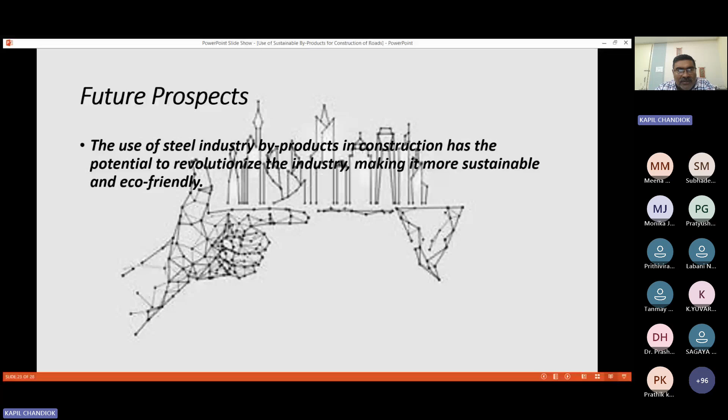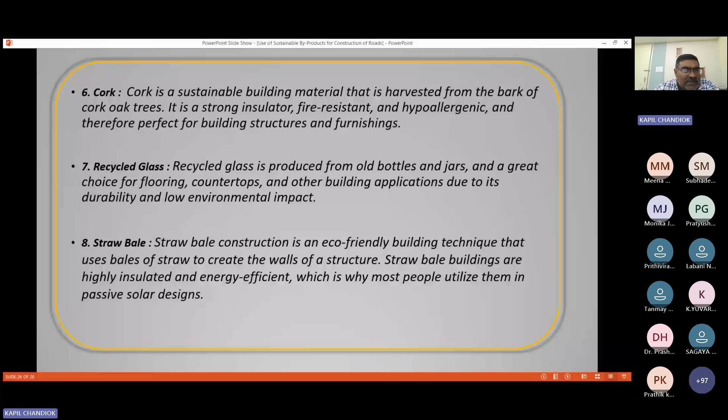Above all, there are some other materials which you can use in building construction, such as bamboo, hempcrete, recycled steel, reclaimed woods, rammed earth, cork, and recycled glass. All these materials are available all around us and we can use them.

So, thanks a lot to everybody. Any questions would you like to ask? I'm there to answer you all.

I think interaction is very poor. Dear faculty member, sir is from the field, we should ask questions. We are theoretical, but sir is practical, so we can ask. We are working in fly ash, slag, GGBFS too. He's providing us technical guidelines also, so we can ask and interact with him.

Even that slag trial has been done in NIT only, and I think one of your students has replaced it up to 60 or 70. Murmu madam has also done it. Yes, sir. Hello there, sir.

Sir, actually in India, fly ash is maximum 35% by mass of cement that they replace, no? I think some foreign countries go for higher replacement. So why is it not adopted here? Because if they adopt more, it will be more economical, sustainable, and environment friendly. Let me give you a very clear explanation of how it is going.

Look, fly ash is coming from what sources? Fly ash comes from two sources. First one is the power plant, which is again bifurcated into two parts: AFBC and CFBC. It's coal based or husk based. One comes from the direct reduction process, and another comes from coal based power plants. So whatever fly ash is used by cement plants, it comes from the coal based power plants only.